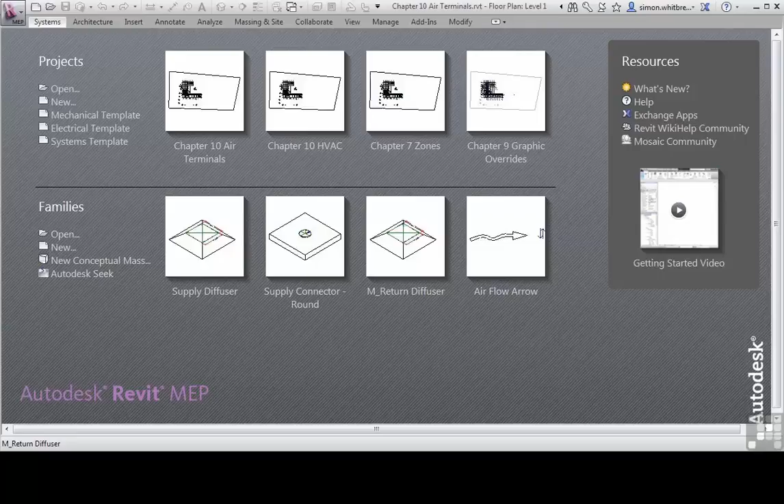From your Startup screen, click on Open, browse to your Chapter 10 folder, and open up Chapter 10 Air Terminals. Placing elements such as air terminals and mechanical equipment into your project largely depends on how the element was created as a family. From your project browser, scroll down to the section HVAC Design and open up Level 2 Ceiling Plan.

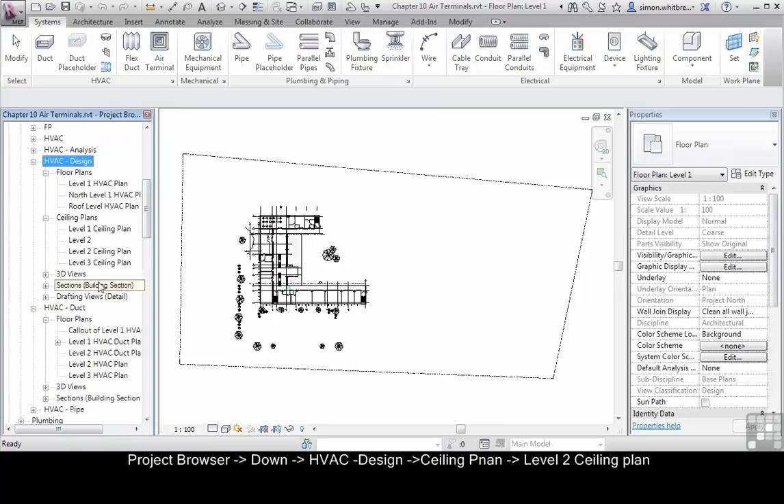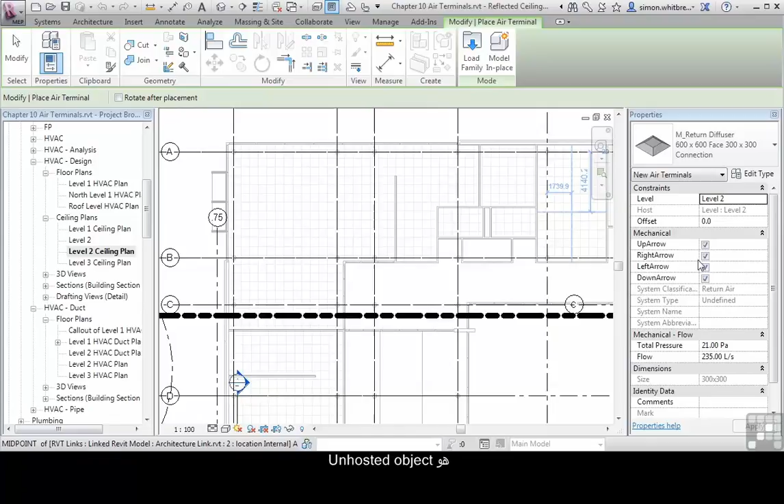Zoom into the north part of the building, and you can see here that we're ready to start creating our design. From the Systems tab, select Air Terminal. The return air diffuser shown in the Properties palette is an unhosted object. That means that when I place it, it's going to try and affix itself to the floor. Or more accurately, it's not fixed to the floor itself, it's using level 2 as a reference level. So if I change that offset, say to 2450, I can see the diffuser, place it in my plan, and place it anywhere.

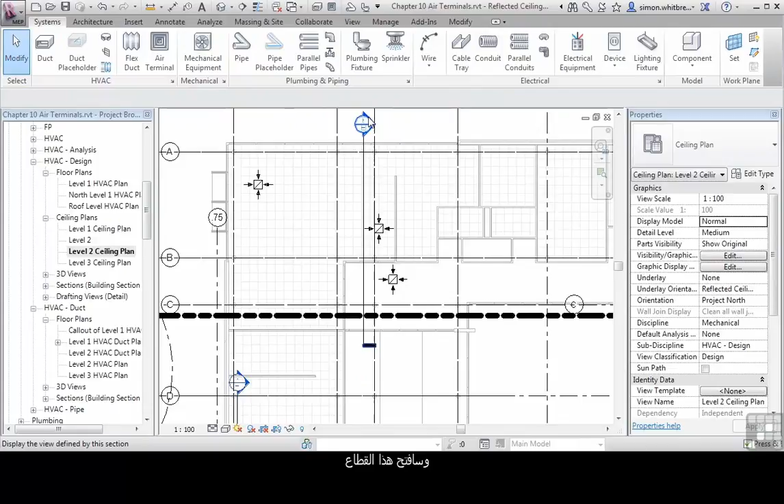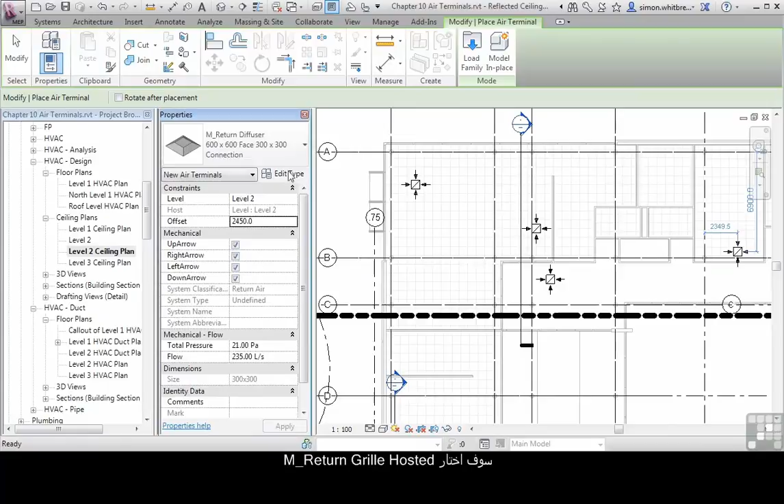So, if I go and create a section through the building, and go to that section, we should be able to see those air terminals are actually floating in the air. They have no relationship with the linked architectural file. Let's go back to the Level 2 ceiling plan. Click on Air Terminal again, and this time select another type. Here I'm going to select the return air grille that's hosted.

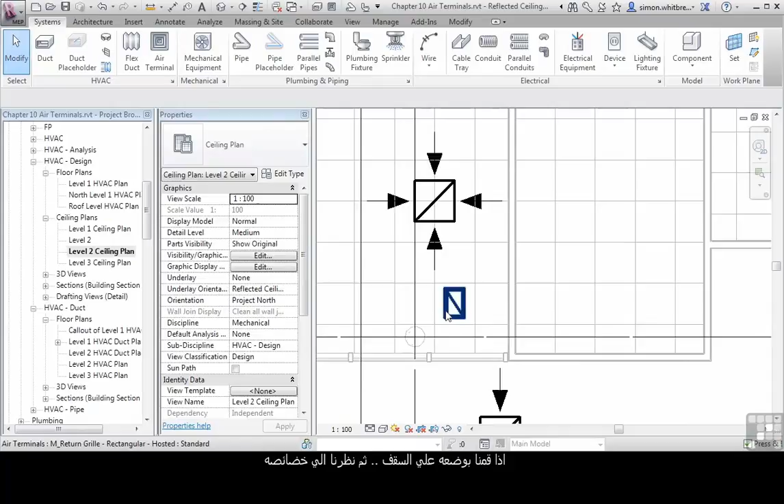With this hosted element, I have options for placing it on a face or placing it on a work plane. My option here is to place it on a face. If we place this on the ceiling and look at its properties, we can see that this is hosted to the linked Revit model and that its current elevation is 2438. Let's go back to the section.

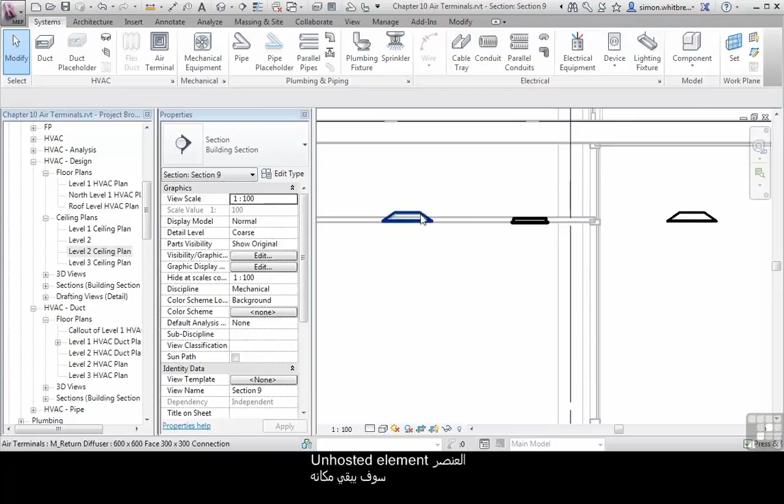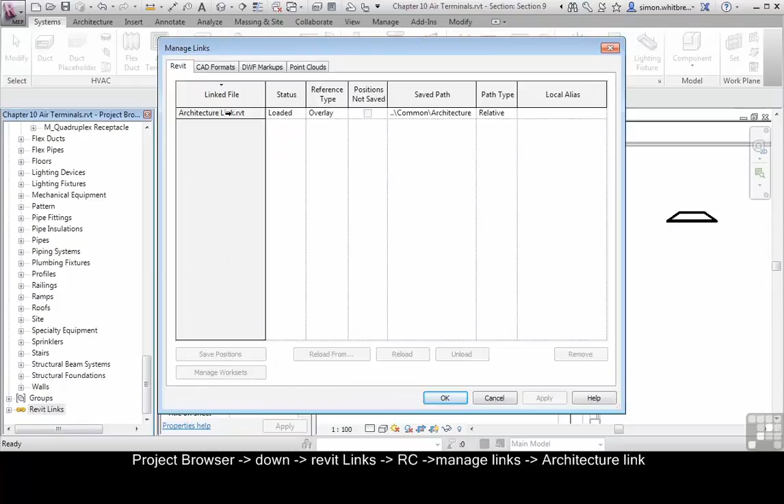If the architect makes a design change at this point and raises the level of the ceiling, then a couple of things could happen. The unhosted elements will just stay where they are, and the hosted element should move with reference to its hosted element. Let's take a look at that in action. In the project browser, scroll down to the very bottom and right-click on Revit Links. Click on Manage Links, and then click on the Architecture link.

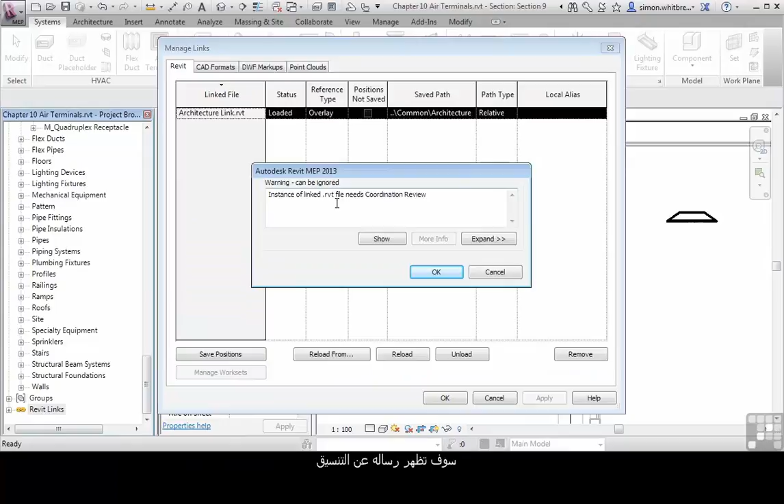The architect has sent us an updated file, so let's click on Reload From, browse to your Common folder, and select the Architecture Link Revised. Click on Open. We'll get the message about the coordination review. For this exercise, we can ignore this message, and click on OK. We can see that the ceiling has moved, the hosted element has moved with it, the unhosted elements have remained in the same place. From the project browser, open up Level 2 HVAC Plan.

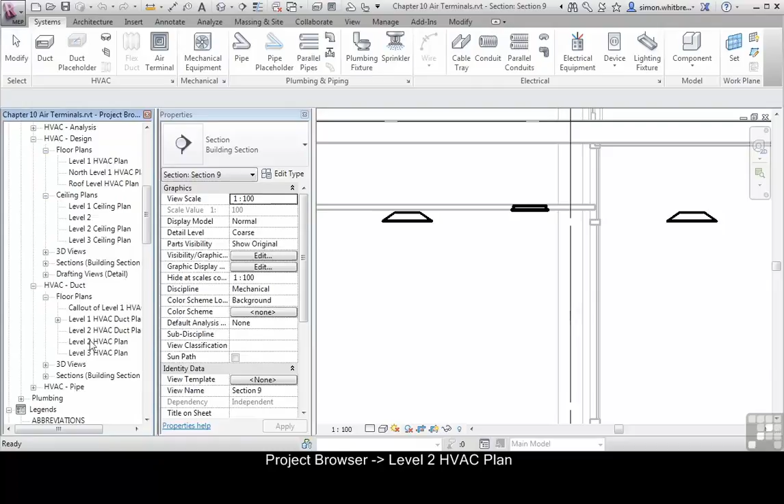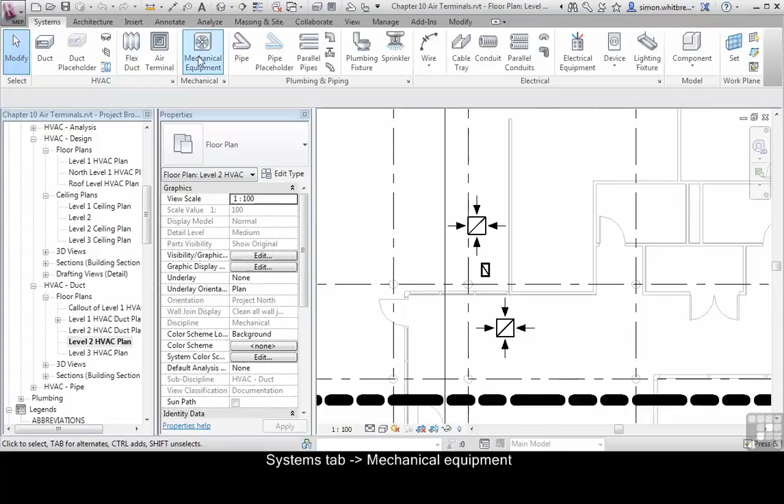So in the plan view, we can see the air terminals, whether they're hosted or unhosted, even though in the case of the return air grill, we can't see the host itself, i.e. the ceiling. Placing mechanical equipment is a similar process. From the Systems tab, click on Mechanical Equipment, and here we have a water heater. This is a wall-mounted water heater. The default is placed on a vertical face. I can find a vertical face and select it.

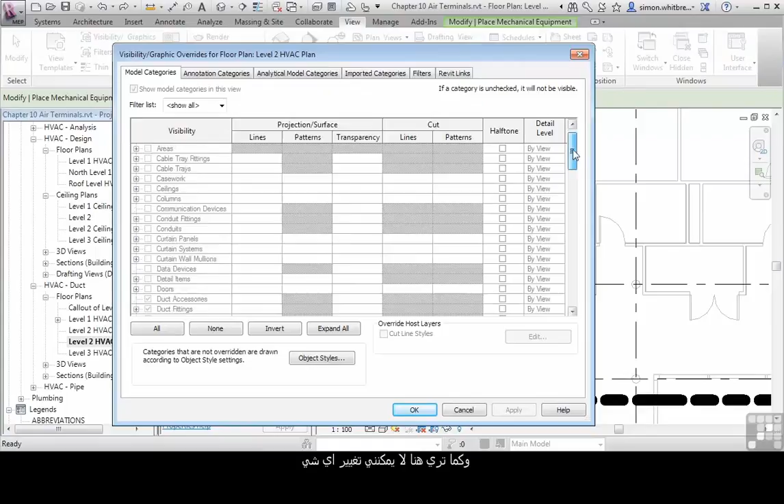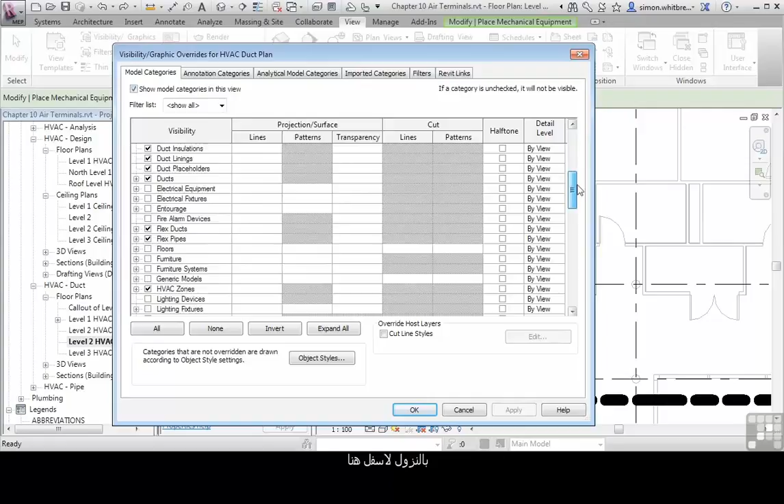We have a message come up that says none of the elements are visible in the floor plan. So let's check the visibility of this view. From the View tab, we'll try Visibility Graphics. And as you can see here, I can't change the visibility of any of these categories, as this view is controlled by a view template. So let's go to the View template, click on Manage View Templates, and scroll down to my HVAC duct plan, and edit the graphic overrides. Scrolling down in here, turn on Mechanical Equipment, and click on OK.

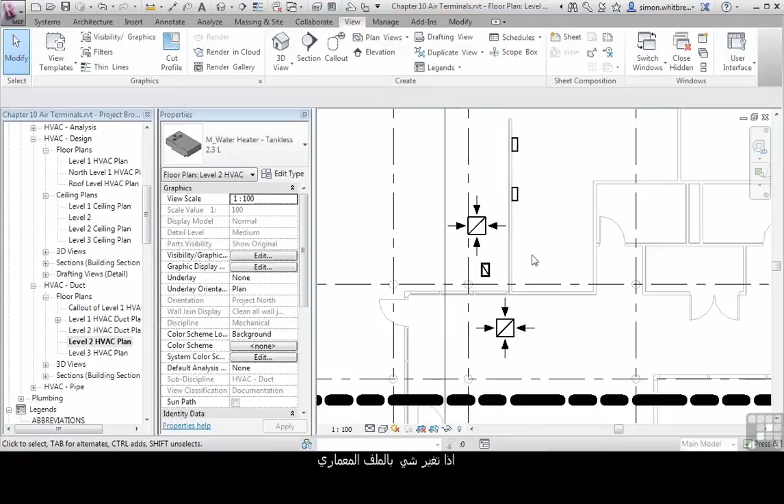Now we can see our water heater. Selecting it tells me that it's hosted to the linked Revit model. And in just the same way as the diffuser, if the Revit model changes, then the location of the water heater will change.